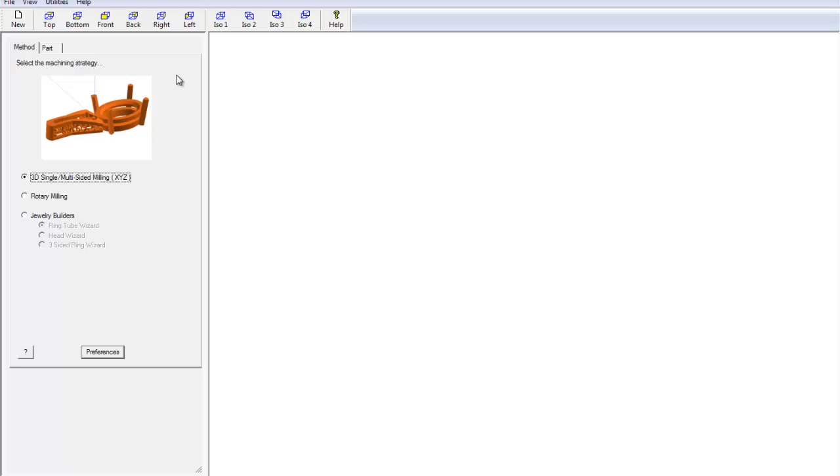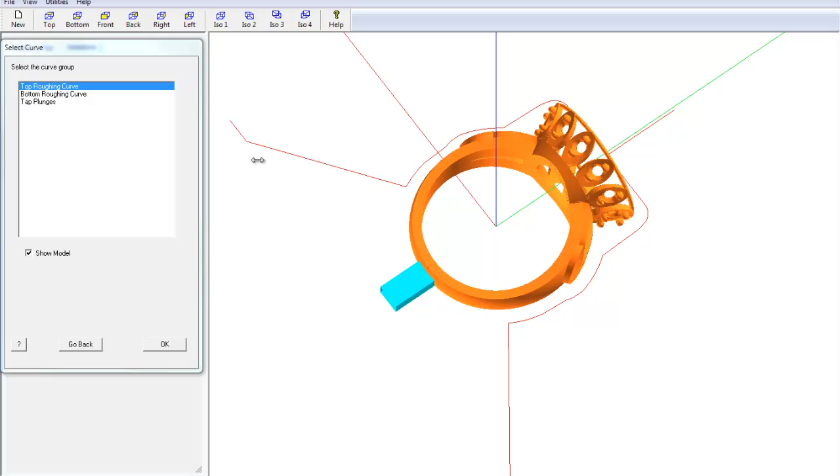As always in ProtoWizard, you're going to select what type of operation or type of machining strategy you would like to do. We're going to do a three-sided ring. Now notice that we have three different curves. And if you see the red line in here, that is our rough out curve. It follows the shape of the part but staying away from it, and this will completely cut that raw material out of the way. You'll even notice that there's a little line coming off of here horizontal. This is to break one half of the cutout versus the other half of the cutout, and you'll see that in the video here in a little bit.

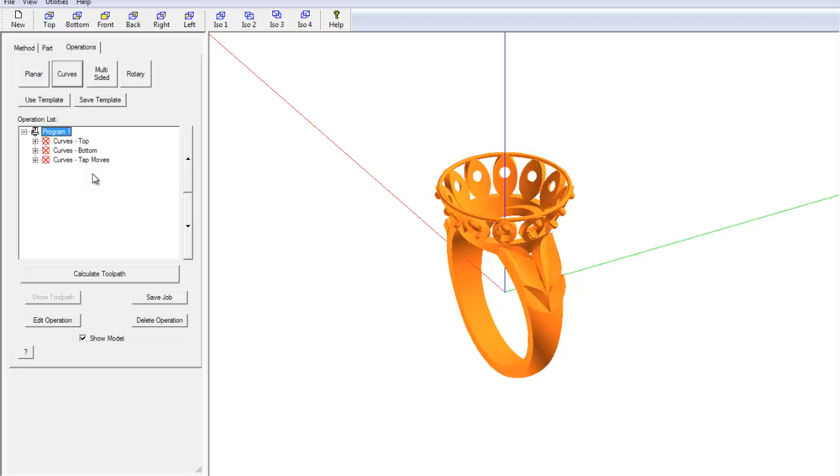Now in the normal 4-axis world, the next thing you would probably do is do your two-sided flip. But in 5-axis, the two-sided flip will eventually uncover the entire ring. We don't want to do that yet. We want to leave it as solid as we can for the longest period of time. So what we're going to do is do a rotary operation right now. Normally you would go ahead and do your two-sided flip now and clean this out. But because we have these pieces under the head, we're going to do a special type of cutting operation.

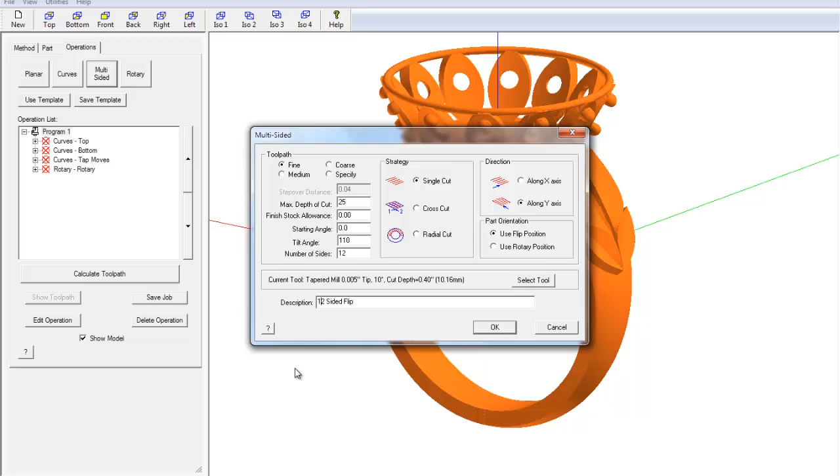And what I'm going to do is go back and select my tool, change my feed rate to 1000. I'm going to tell it that I don't really care what the depth is, so I make it like 25 or whatever. Now here's the key. I want to rotate this around the maximum of 110 degrees. And it so happens I know there are 12 of these ellipses going around there, so I'm going to say we're doing a 12-sided part, like so. Rest of the parameters we'll leave alone. Now the last thing you would do is go ahead and do your two-sided flip.

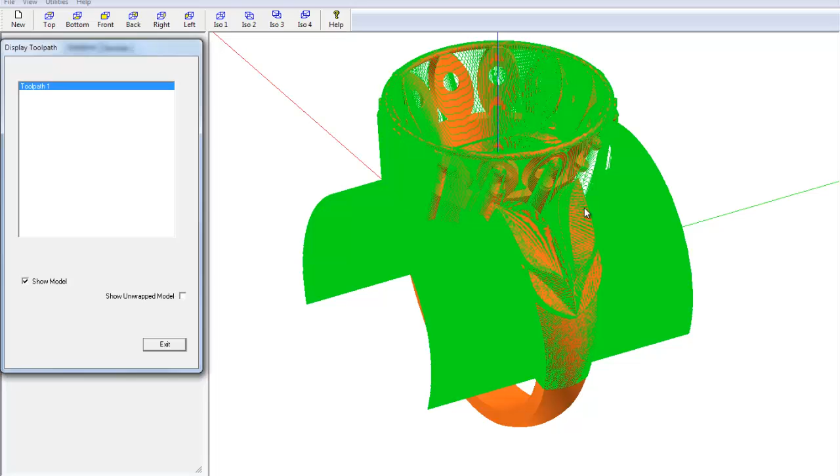Okay, so let's just look at a couple of these real quick. What does our top curve toolpath look like? You can see the green line around there represents the toolpath. And what does our rotary look like? Pretty common. We told it to go all the way out to the edges, or beyond the edges, plus and minus 10 millimeters, remember.

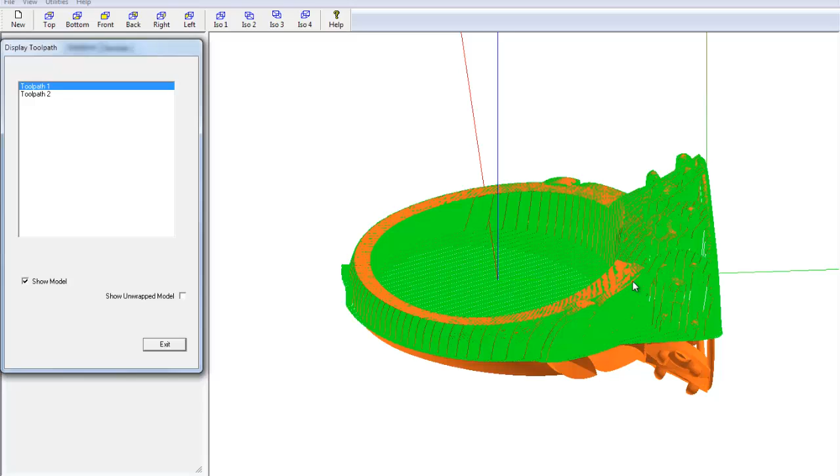What does our multi-sided flip look like? Well, it looks just like that, but 12 of them. And they go all the way around the part. You also have your two-sided flip, just like you would normally see before, except you no longer have a core file in here. So let's see how that looks actually on the real machine.

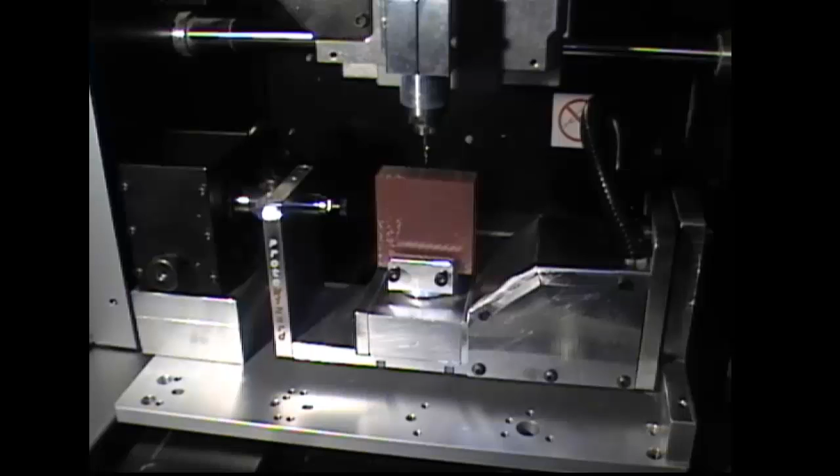Okay, this is how it looks inside of the machine. You've got your piece of wax in the 5th axis. The very first thing it's going to do is rotate up 90 degrees to our flip position so it can cut out the top roughing cut.

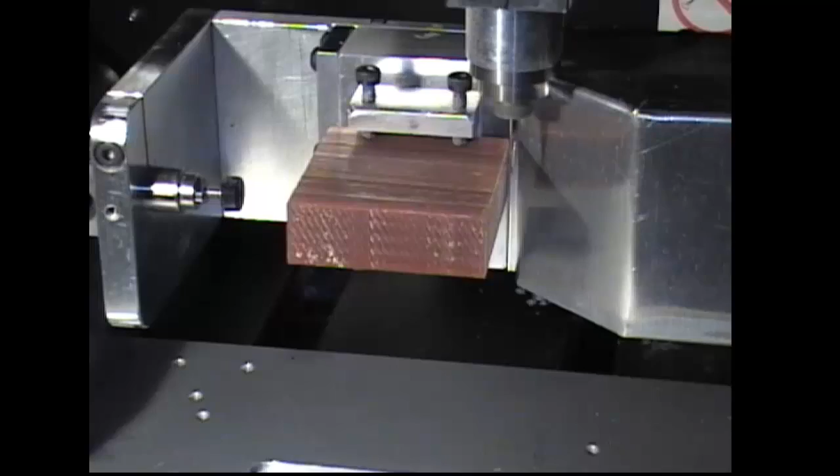So now it moves around the shape of the part. At this time it's going to lift up, flip the part over, and do the bottom side. So this will be our bottom roughing cut.

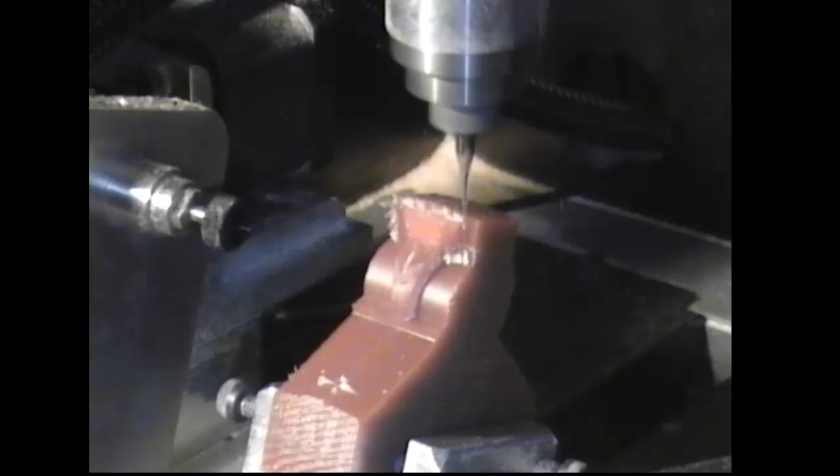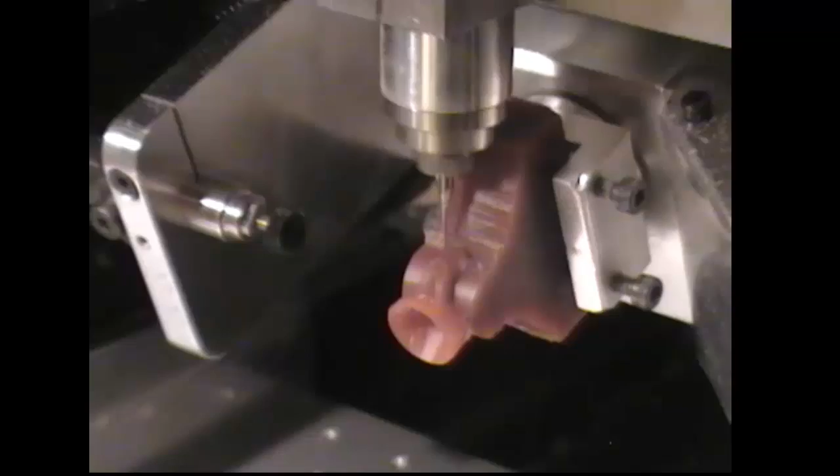Now what it's going to do is rotate up, and it's going to bring it all the way back around to a negative 110 degrees and start doing the roughing passes. And if you recall, the next operation in this process is going to rotate the ring around and come in to just below the head and begin to cut out all those 12 little windows.

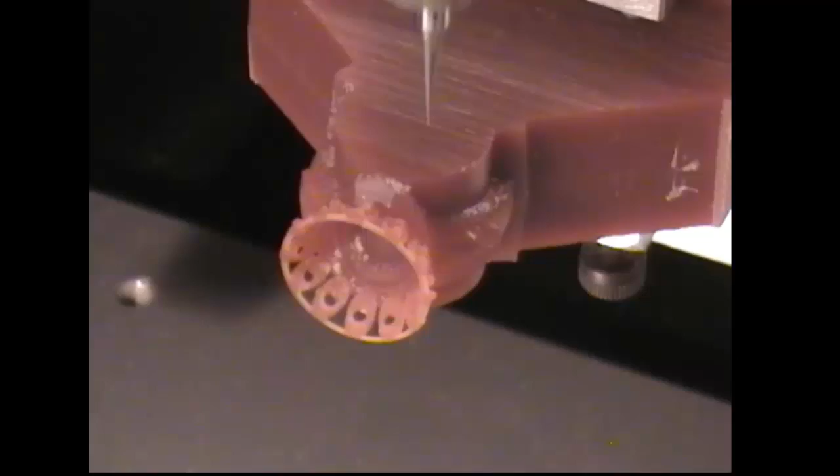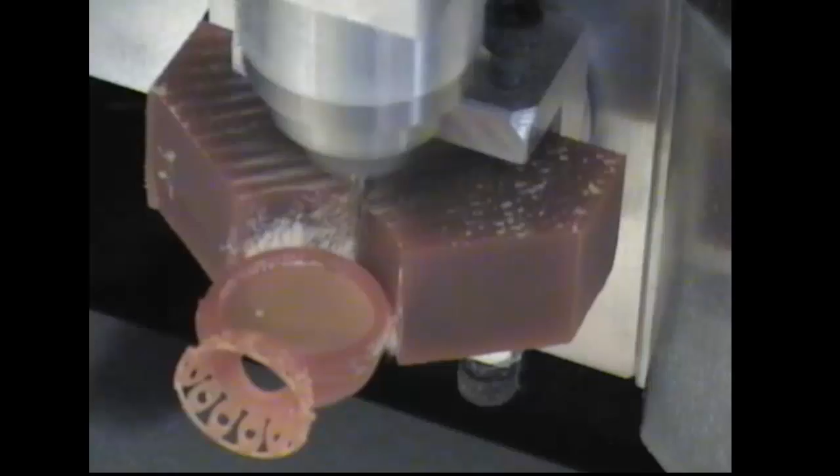Here is the finished part of the ring. It is just cutting past the shank right now and cutting past the little support that was left in. And we're finished.